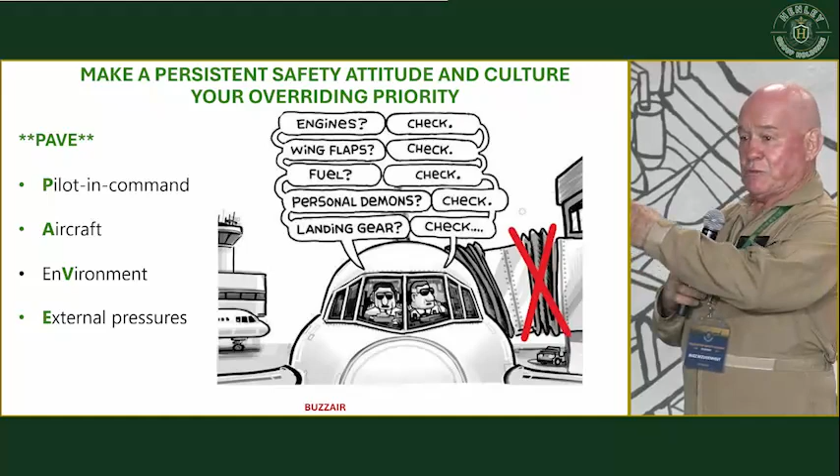Okay, can you see anything wrong with those guys doing all their checks? We're the airline pilots, huh? They're doing all the checks, but they haven't disengaged the passenger boarding thing.

Okay, PAVE - there are so many numerous checks. If you go onto the internet you'll find PAVE, I'm safe, FORDEC, all kinds of checks. I like the PAVE one because it covers most things, and I'm safe. So let's continue with this.

Pilot in command - the implementation of the I'm safe shows I'm safe documents list the pilot is able to answer any questions on which he or she may need assurance regarding their physical and emotional condition. The pilot should always be in a position to make decisions when it reports their level of fatigue, health, mental state, and any other variables that they know may affect them performing effectively in a safe manner.

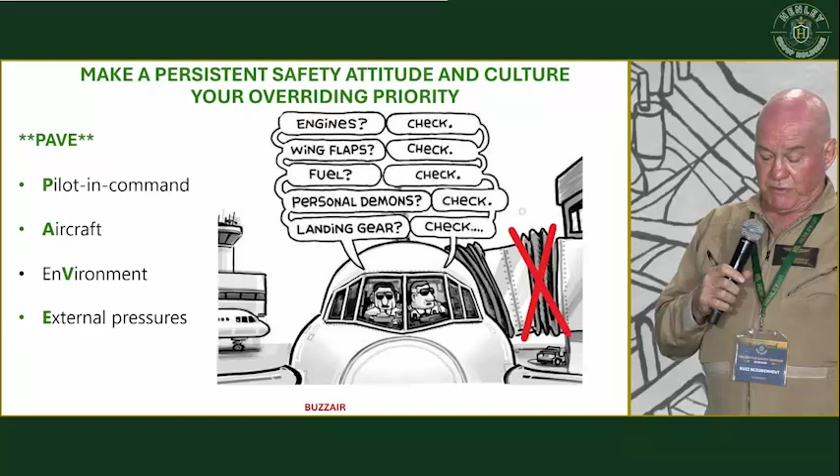I've told most of you that sometimes I've postponed flight tests with people because they think I'm talking nonsense to them and drinking coffee for 30 minutes. And what am I doing? I'm mentally probing them to see where they are domestically and business-wise, because they feel obligated if they booked a test with me to come to me, okay? And I've postponed a couple of people, and by the way, I don't charge them a cancellation fee, so don't feel bad, okay?

The pilot and the aircraft we've discussed - the psychological aspects we'll discuss later. The pilot should seek to determine any conditions the aircraft may pose on the safety of the trip, for example.

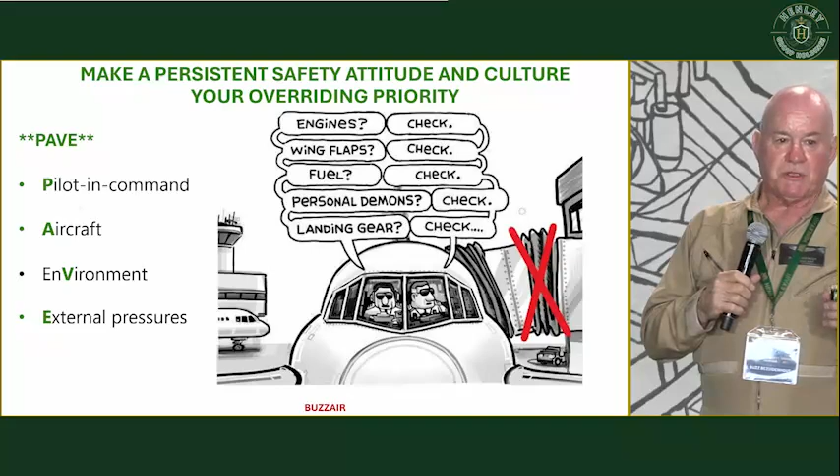Most of you as pilots know, I'm not going to repeat all this - the aircraft's got to be 100% serviceable. That means every document in the aircraft must be up to date, signed out: certificate of safety, certificate of registration, certificate of release, flight manual, radio license, insurance, AOC copies - all that stuff must be in the machine. So if you've got any questions on that, let me know. Okay, you can scroll on.

Most navigation and letdown procedures now are based on GNSS, so I wouldn't worry too much about nav aids. If any of you IF rated will know, if you look at the Jeppesen charts, you'll see everything nowadays is RNAV. In fact, when I test people, I make them come to me with a certificate so I can issue an RNAV endorsement for them.

Okay, external pressure. These factors are factors that influence the flight externally, which creates a sense of time-related pressure for the pilot to complete the flight. These pressures include, but are not limited to, trip planning, diversion or cancellation plans, if the need does arise due to bad weather.

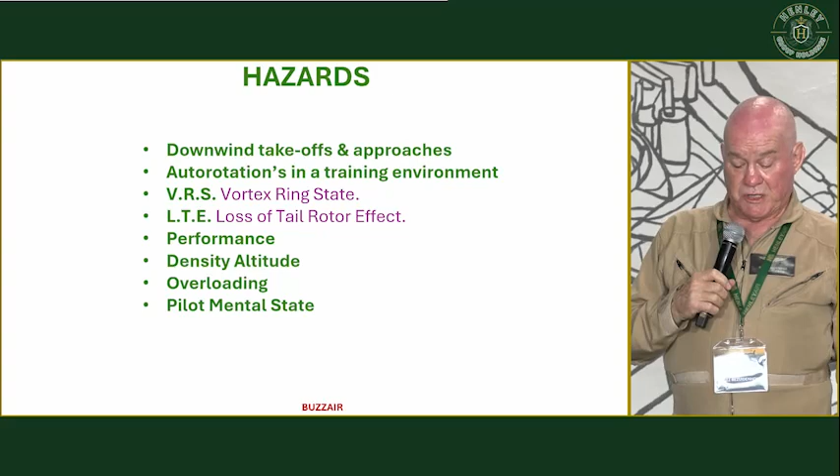In relation to the aerodynamic conditions that cause problems, it must be borne in mind that these relate to the direction of relative airflow on the relevant lifting surfaces, both main and tail rotor, and not necessarily the attitude of the aircraft or wind, although these can be deadly contributors to the development of these critical conditions.

If you, in an anti-clockwise rotor, do in still air conditions a very rapid turn to the right, you can introduce LTE with no wind.

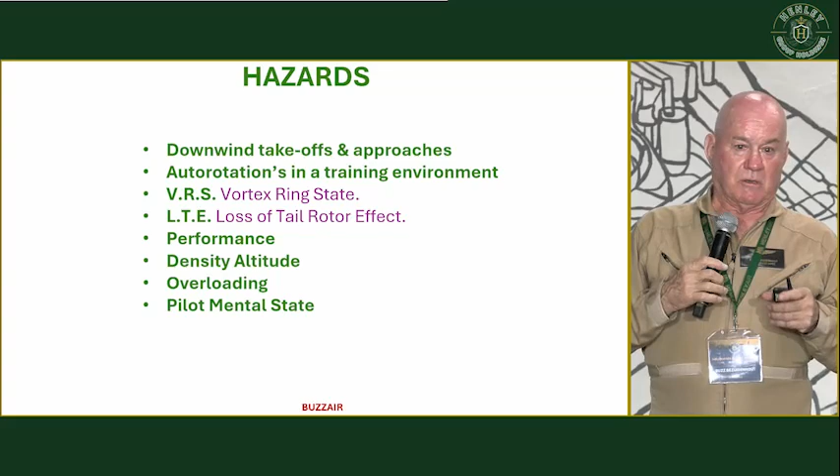I experienced vortex ring in a Drakensberg hovering next to a waterfall with one of my clients. In the hover, there was an updraft. So you think about relative airflow. Don't think about the wind and the conditions - they can exacerbate the situation. But think about relative airflow on the lifting surfaces. That's what counts.

Okay. Yeah. What must be borne in mind is that when these critical conditions are demonstrated in a training environment, it is within a controlled situation.

With the flight instructor forcing the aircraft into this state and not operating outside his or her own limitations. In real-life situations, the onset of these conditions can be extremely rapid, aggressive and violent given the right aircraft configuration and environment. The most common are the ones that cause a high percentage of accidents.

Now, before we move on, I used to demonstrate LTE to people, and I normally did it from 1,000 feet for safety.

And I demonstrated to one client one day, and the machine went into real LTE, and it rotated 360 degrees and fell 700 feet in a matter of seconds, because it was dramatic and sudden. The bottle of water that was under my feet hit the perspex in front of me because of the centrifugal reaction and the rapid rotation.

If you look at accident statistics and see how many machines are subject to LTE and vortex ring - don't confuse translational lift when you're moving forward or decelerating. The vibration level you experience is not LTE or vortex ring. Don't get confused. In vortex ring, the aircraft will shudder and start yawing, also pitching and rolling in what we call incipient vortex ring. So be careful.

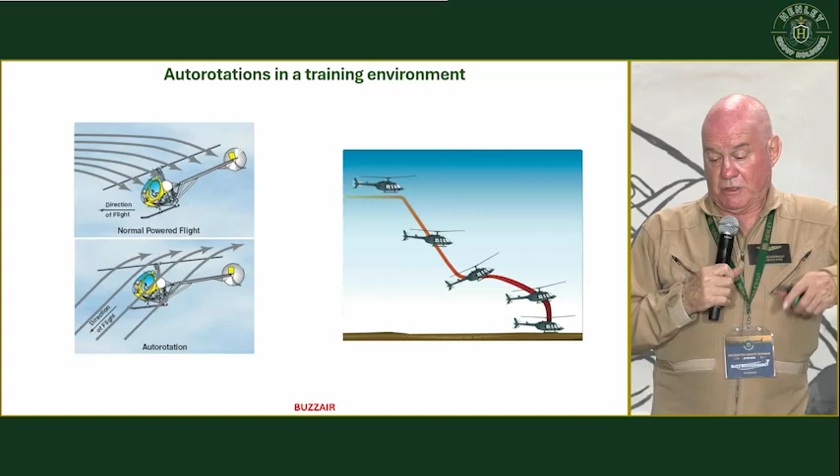As mentioned in the previous paragraph, a good culture of airmanship, aircraft handling, and safety focus should provide the average pilot with adequate protection from these contingencies. Don't do it on your own. Basically, every 6 months you should book an advanced training session with an instructor, and you can introduce the technical and other stuff that I've covered with you.

One of my clients who trains with me frequently, does dual checks with me frequently, had an engine failure in a Jet Ranger with 4 pax on board and landed in the veld without even scratching the skids because he knew what he was doing. You all know Mike Barnes - he had an engine failure in a brand new 407, landed safely. I did his PPC check last week, him and Eric.

Vortex ring, what we've just discussed, is not necessarily in a situation where an instructor is demonstrating it to you, descending and showing you how it happens. As I said, I had vortex ring in a 407 hovering next to a waterfall, and everybody will say that's not logically possible. But there was an updraft, similar to the downwash, and the machine started shuddering and started settling. What did the pilot do? Pulled up the collective. Luckily we had 800 feet to recover, so I just said to him, push in the left pedal and fly out of it. Think about what I discussed with you - relative airflow on the lifting surfaces.

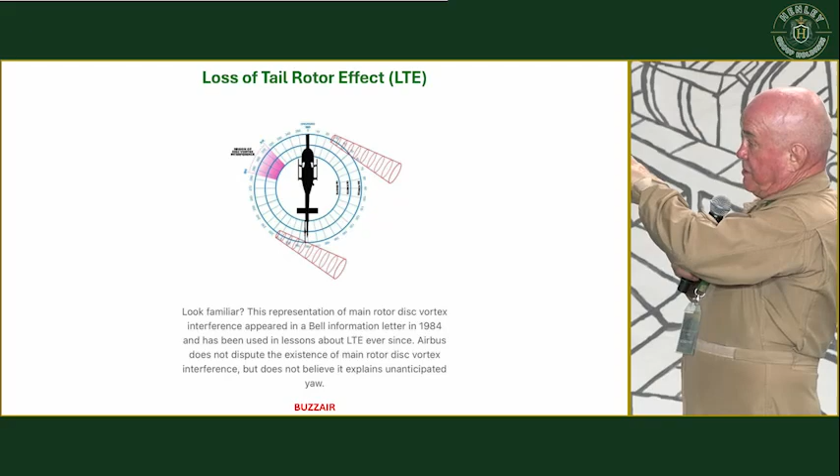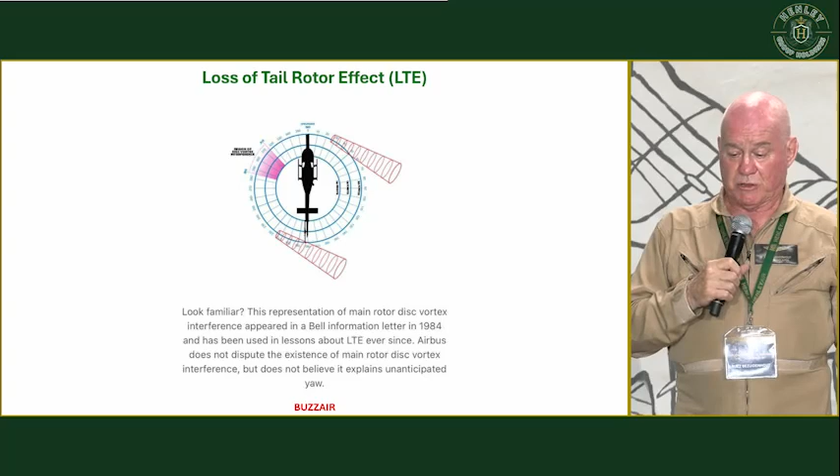All right, this is LTE. I'm not going to go through the whole of LTE, but the major cause of LTE is if you're doing a confined area approach at a low power setting and you start applying power at the bottom. Because of the low speed and the high power setting, that vortex generated by the main rotor as you increase the lift, if you've got a 10 o'clock wind blowing, is going to blast that disturbed air through the tail rotor and probably cause LTE. I've had that as well, I've got that t-shirt too. Any adverse wind will exacerbate this condition, but remember what I said to you - if you do a very rapid right pedal turn in still air conditions, you will induce LTE.

Performance, height velocity curve.

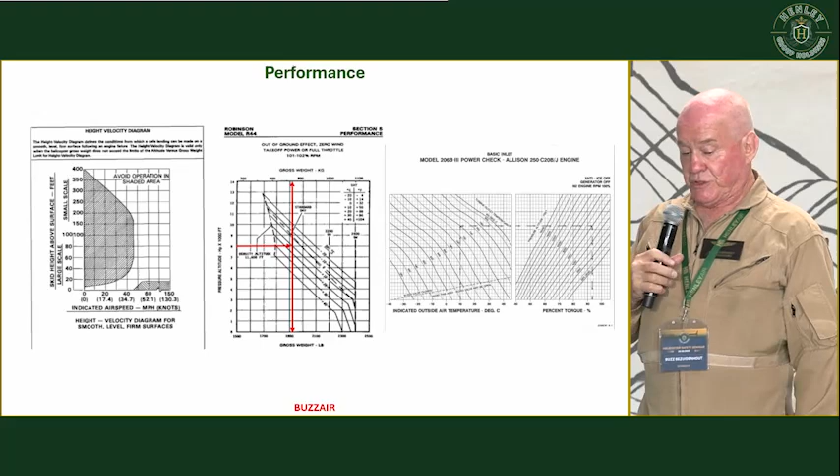That's a Jet Ranger height velocity curve, which is only valid at sea level basically. And next to that in the flight manual, you all know as instructors, is another chart or graph that indicates altitude and temperature, etc., to make this valid.

Think about the Robinson. It's not one height velocity curve, it's two. The 407's got four strips of height velocity curves, varying on weight, temperature, altitude, etc. So this one is quite primitive. It hasn't been modified because it costs money. So what they're saying is if you want that height velocity curve to remain the same, you have to load the machine in accordance with the other chart. Okay. How many of you instructors know that?

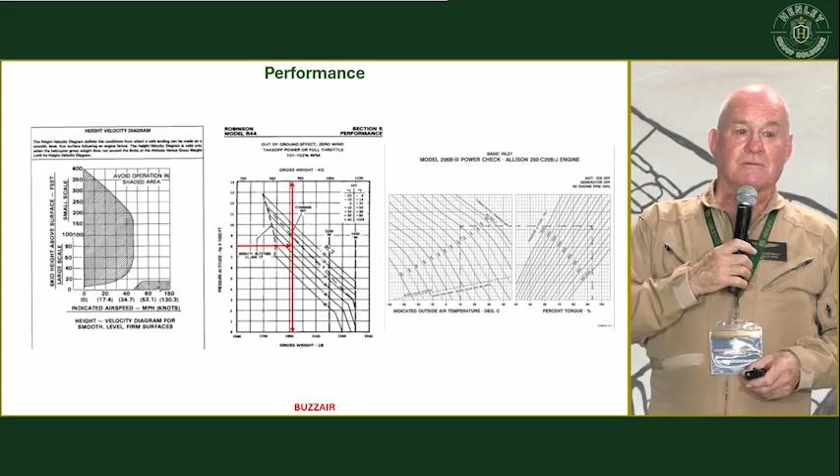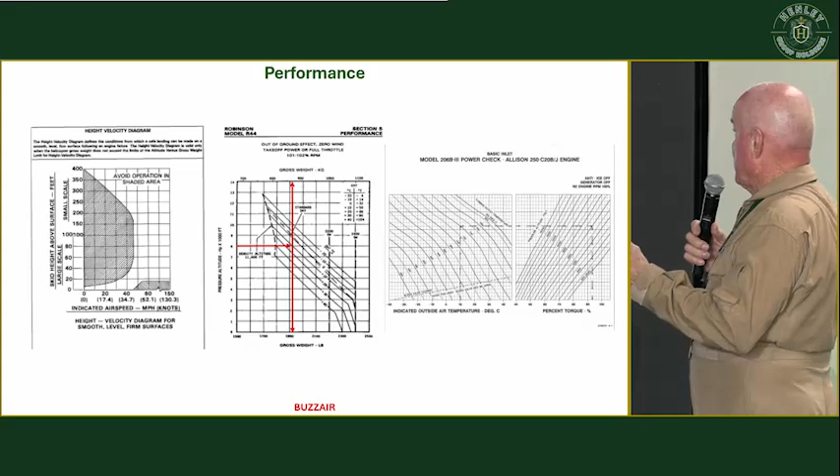You all look puzzled. Okay. What else have we got here? Performance, out of ground effect, zero wind, takeoff power or full throttle, etc., etc. Just read the chart. Power check charts.

All right, we've all flown R44's piston engines. How do you establish the power on a piston engine aircraft, not just helicopter? On a turbine, you've got a real power check chart, which gives you a definitive power output at a given temperature and altitude. Tells you whether the engine is good or not. How do you judge a piston engine?

Performance on a piston engine. The engine. Aircraft, helicopters, fixed wings, performance of the aircraft tells you what the engine's doing. You've all flown weak 44s and strong 44s. You know what I'm talking about. You'll fly one which is sluggish and doesn't have enough power, and then you fly another one with full fuel and 3 pax on board, and it just gets out of the confined area at ultimate heliport.

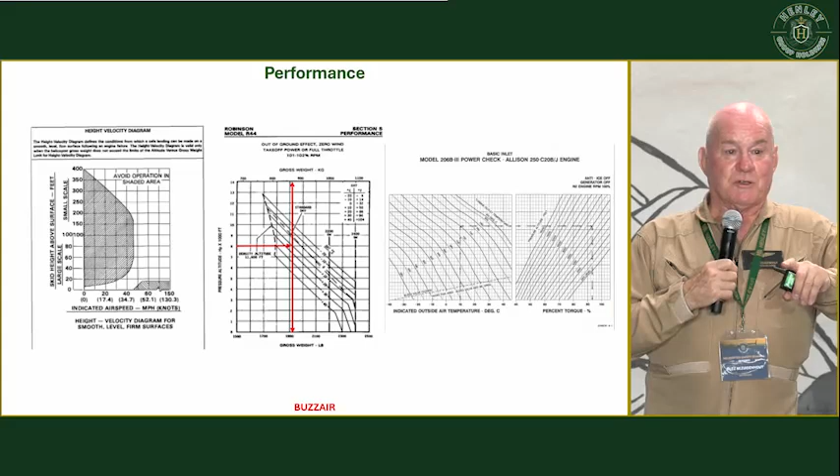What is your rate of climb in a Raven 2 at 22 inches and 60 knots at average weight? Anybody know? About 1,000 foot a minute. Then you know the engine's good. Because whether the engine's good or bad, you're still going to see manifold pressure and the other things. You're not going to know except for that feeling. So observe and recognize and register what you see.

What does the average 44 and 22 run on? Temperature, pressure, temperature of the oil and cylinder head temperature. Come on, guys, ladies. Within a needle width of 180 and within a needle width of 350. Whether it's an R22 or a 44, doesn't matter.

And why do I say that? Because that gives you a definitive reference point. If you take off, and everything's in the green, when there's a change in any of those parameters, you've got no reference point. You can say, holy cow, the oil temperature's increased, but I don't know how much it's increased. But if it's increased by 50 or 60 degrees because you observed in flight what the temperature was, then you've got a reference point.

I won't mention the name, but I flew 35 minutes and 6 circuits here at Rand Airport, and I pulled the circuit breaker on an R22. So there was no indications of anything on the gauges, nothing. It kills everything. And the guy religiously said to me on every downwind leg, I'm doing my downwind checks. So after 6 circuits, I waited and I waited and I waited, and I just said to him, no, you were running on Lycoming's reputation there, because there's nothing there. No temperatures, no pressures, no fuel, nothing.